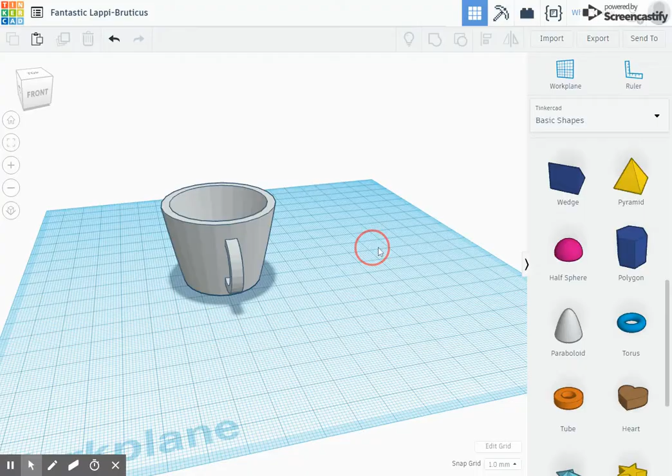So let's make a cup like this as our final little project together. We'll start by getting rid of my cup so we can make one together now.

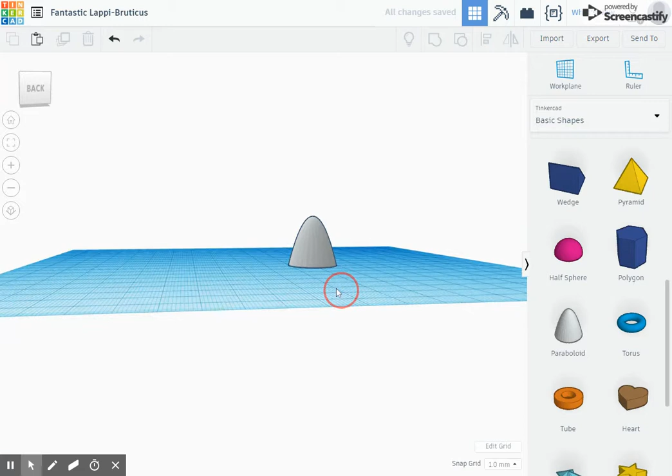We're going to start off with a paraboloid, and this is actually what our cup will be made out of. Can you see it yet? Well, it's actually upside down right now, this cup. So first of all, let's make it bigger. I'll grab one of the corners and hold the shift key down so that it grows all the same size all across and make it nice and big. There we go, that seems like just about the right size.

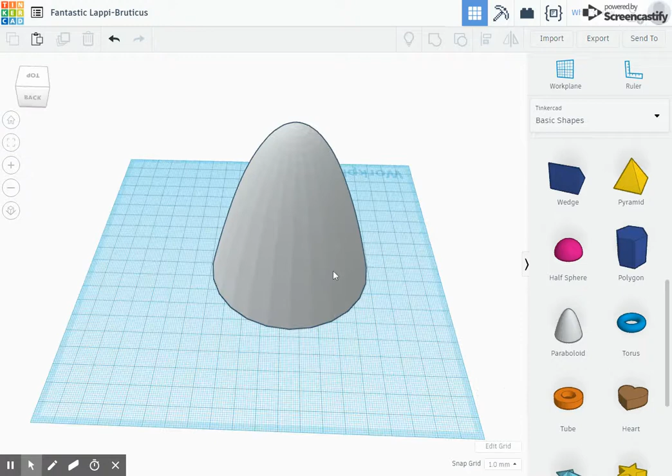But well, if I were to flip this upside down and use it as a cup, I'd have two problems. First of all, I couldn't put anything in it because it's solid all the way through. And secondly, it couldn't stand up because the top of it's too rounded.

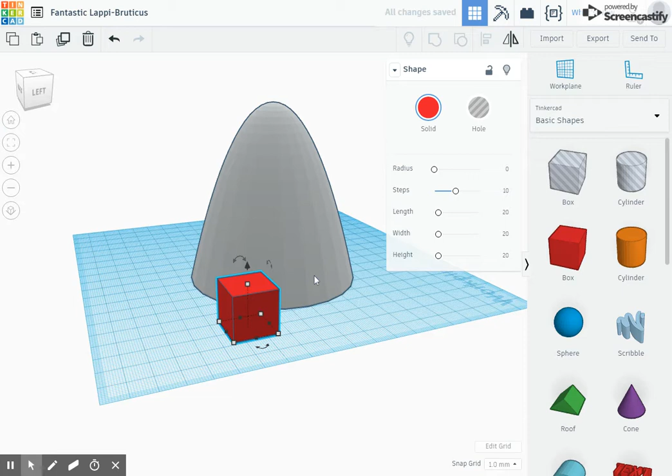Let's solve this problem first. I've got to square off this cup, and I'll do that with a box. I'm going to make a box-shaped hole that squares it off. So take my box, make my box very big. I'm not going to bother with the shift key because I don't really care what shape this box is.

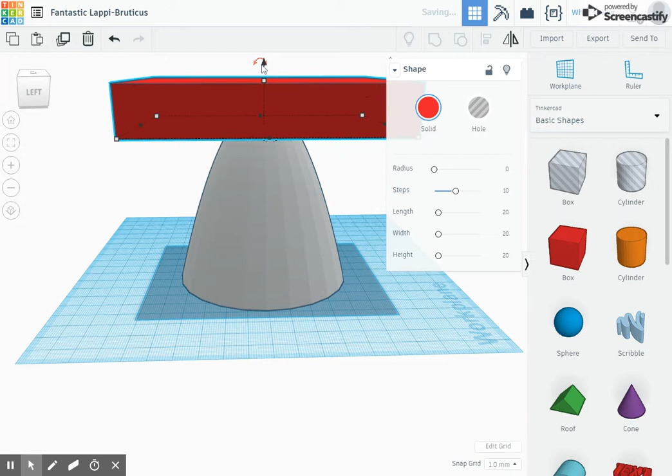And then I'm going to lift this box up here. Now that could be quite nice, but maybe I want this to be a little bit further down. Yeah, that looks nice to me. Make sure I haven't got any of that cup in there. Okay, there we go. Now I'll turn this box into a hole.

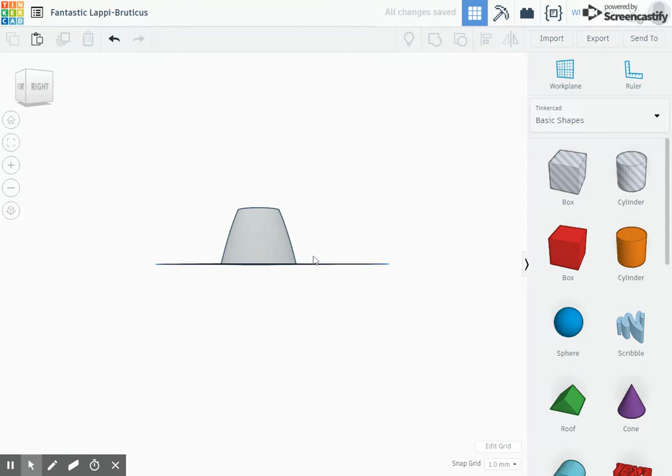And now I'm going to group these two shapes together. Ta-da! There's my cup, well, there's the outline of my cup at least. So I'll take this guy and I will grab it by this rotator and turn it around now, 180. There we go, that's nice.

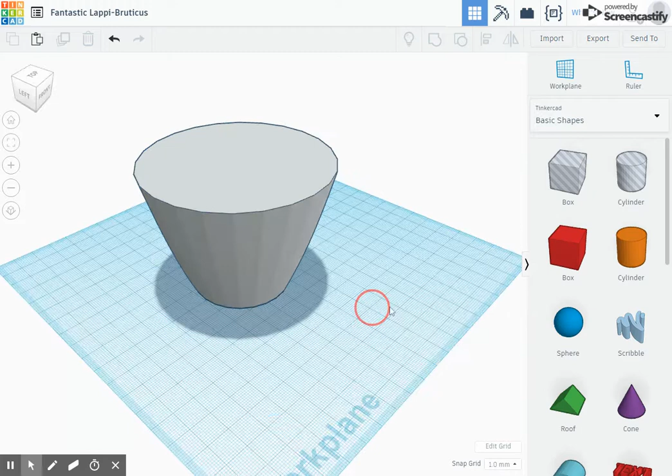Now, it's still a solid though, I couldn't pour anything in it. So what am I going to use to hollow this out? Well, if you're thinking a hole, then you're absolutely correct. But how can I get a hole that's the exact right shape for this? Simple, I can use this shape itself.

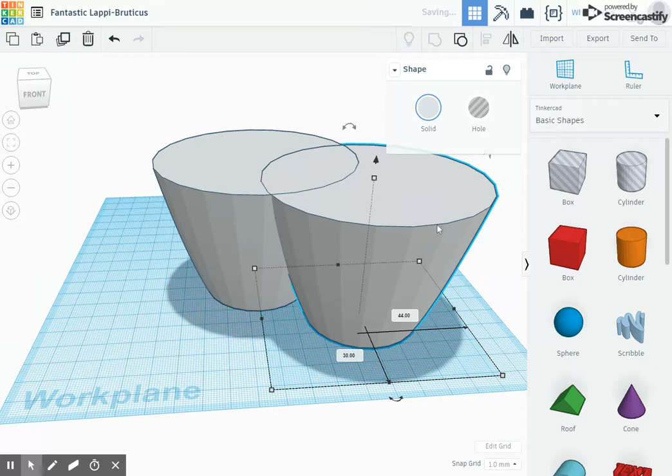So I'm going to duplicate this shape, Control D, or this button. Now I've got a second one. I'm then going to make it a little bit smaller. Hold the Shift key and make it just a tiny bit smaller. Now I'm going to turn it into a hole. So I've got a hole in the middle now.

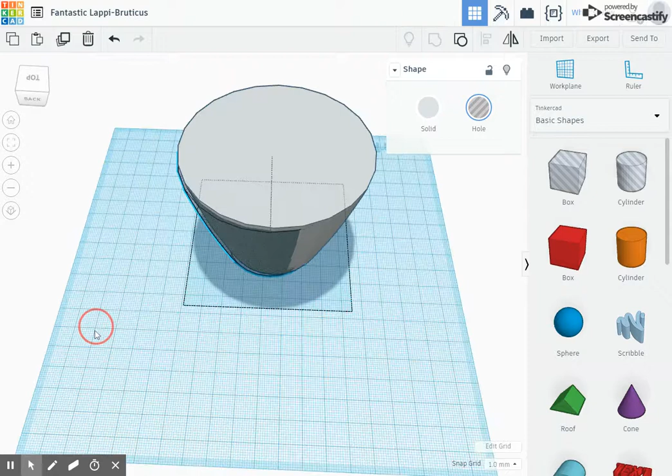Well, it's not quite in the middle, and it's not going to be very useful to me right now as a cup, because I could pour water at this side, but I want to pour it on the top. So I'm going to use the Align tool to help me out. I'll select both of these objects.

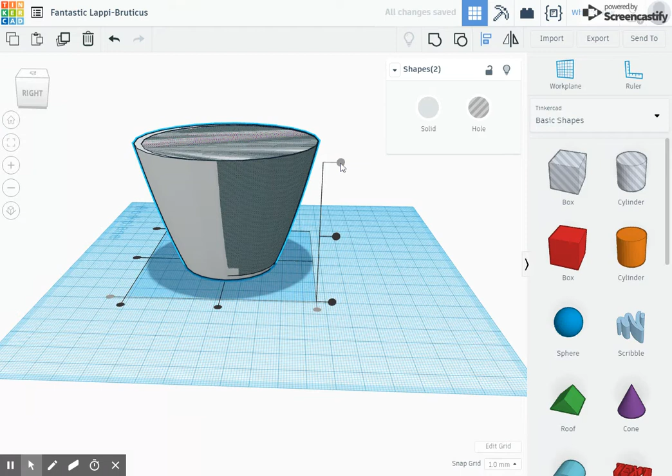And align, or the L key. I want it to align at the top, in the middle, and in the middle on the other side. So now I've got this hole right where I want it, right at the top and square in the middle.

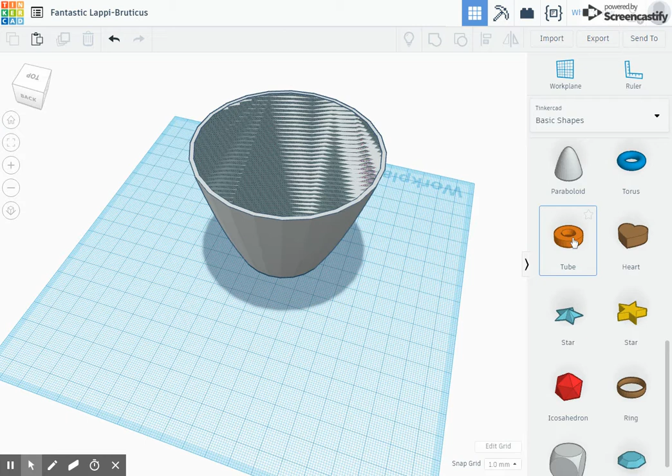So I've got a pretty good nice looking cup so far, but I want a handle still. Now I could make a totally rounded handle with a torus, I could make a very thin handle with a ring, or I could make a chunky squared off handle with a tube. And I like the way that the tube looks, so I'm going to grab a tube.

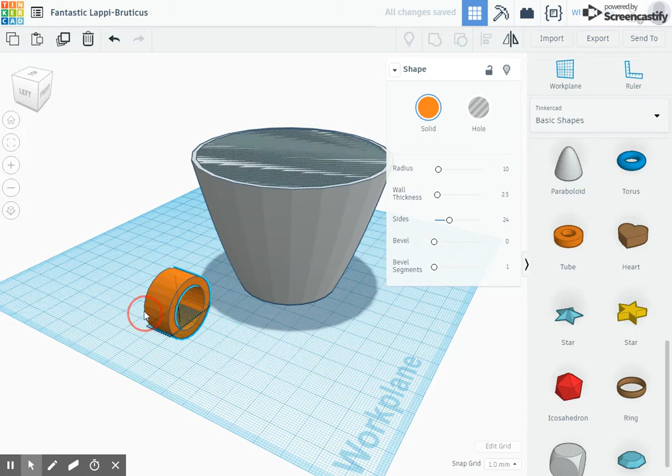Handle's got to be a little bit bigger, I think. Definitely need to flip my handle the right way around now, so let's see. Looks like this one's going to help me out. Turn it 90 degrees that way. And that's going to be a bit too thick to be comfortable, I think. Gonna make that a little bit thinner. Yeah, that looks nice.

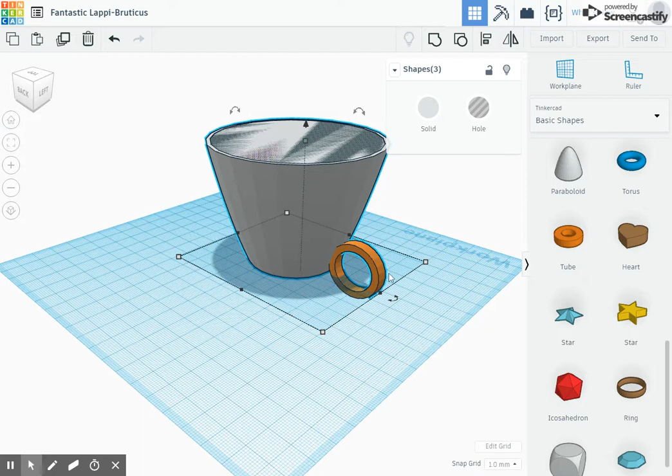So then, similarly, I'm going to select all of these shapes again. Align, center, please. And now I'll drag it, the handle, up to where I want it. Oop, that was me trying to rotate it accidentally. I want to grab the little arrow button, and there we go. Drag it up. Perfect.

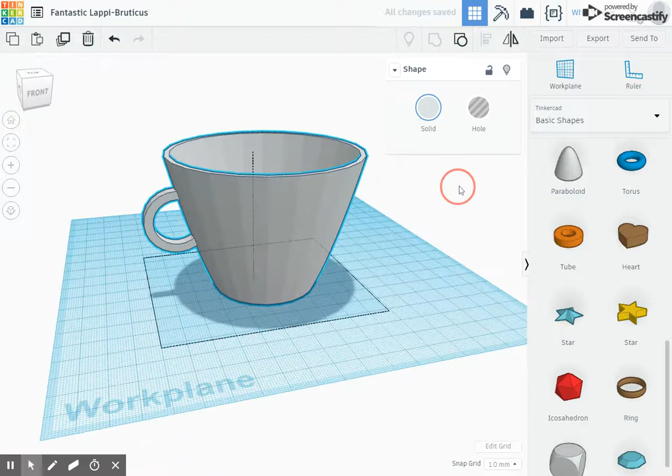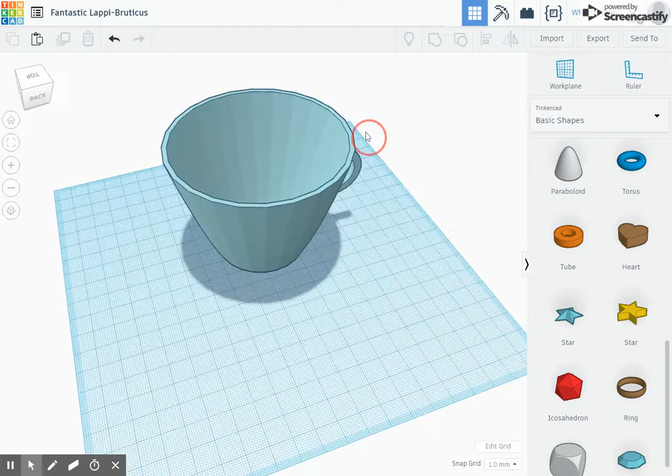I'll select it all, group it all, and there's my cup. Now, I could change the color if I want to. I think I'd like my cup to be a nice blue, so solid baby blue. And there's my cup, isn't it pretty? Let's save a picture, and we're done.